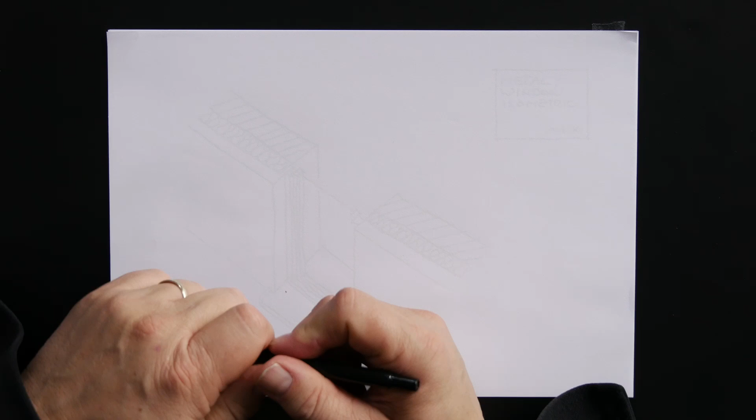Yeah, that's true. When we talk about tolerances in facade systems, we talk about millimeters. Yeah. Half millimeter, millimeter. When we talk about brick structures and concrete, it's centimeters. It's a little bit depending on the contract and the country. But for me, as a bricklayer and also making concrete walls, 2.5 centimeters is still acceptable.

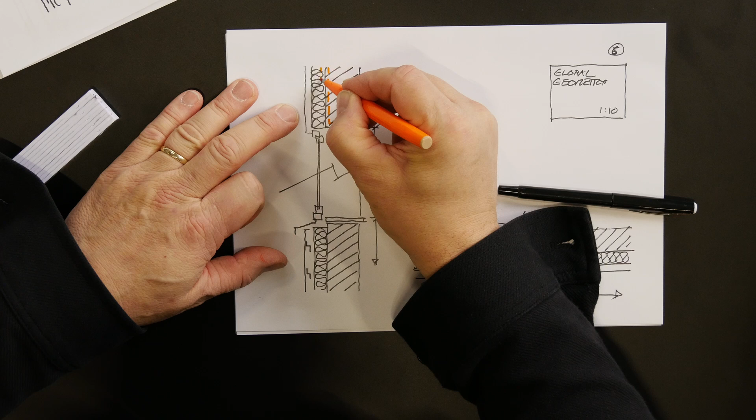So that means within 2.5 centimeters the wall somehow can find its position, while the facade system needs to be flush and the windows are pre-manufactured, so they need to fit in. When I now draw this as a line, inner opportunity and outer opportunity of where I can find the wall. Yeah, so it's in principle a zone. You have a center line, that's ideally the position of the wall. That's also what the construction guys and the general contractor aim for, but he is allowed to deviate alongside that.

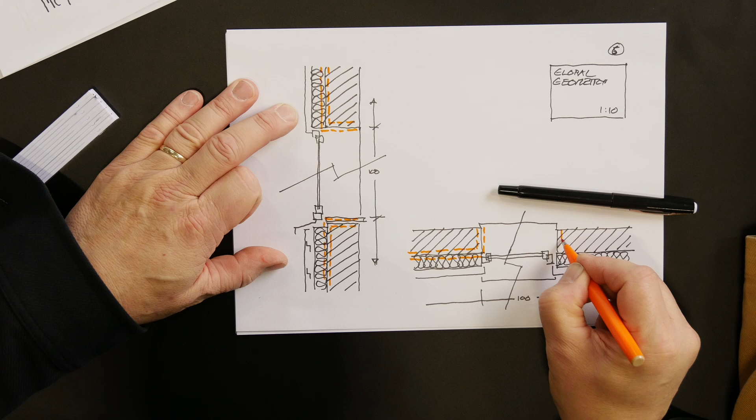And the window defines the tolerances. In this case, 15 millimeters in one direction sums up to 30 millimeters in total. So whatever the wall does, your facade construction has to be adjusted to that. I see. So we assume this is 15 millimeters in the one direction and the other direction, so 1.5 centimeters as a setting. And then it could be this direction or the other direction, so within these boundaries, which means the window itself has to be narrow enough to always fit in. The facade system has to be straight enough, or say flush here in this situation.

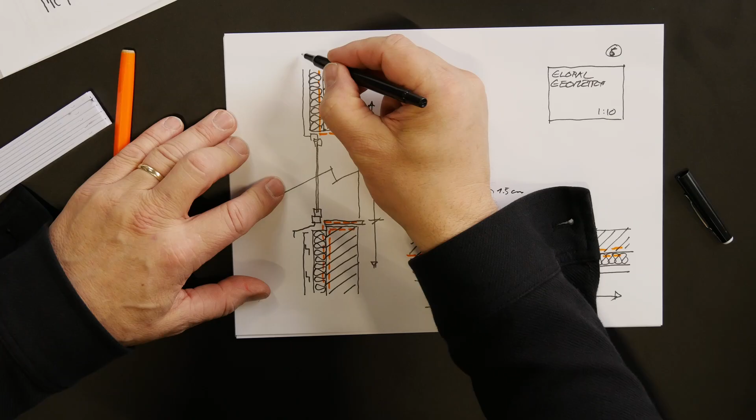Precisely. Which means we need to somehow be able to adjust it in this direction, which we saw at the mock-up. And then this creates, again, the 1.5 centimeters. This creates a flush facade, an always fitting window. But the interfaces, as we discussed in the details, have to secure that it's airtight, watertight. They have to be quite flexible.

So you can imagine that, for instance, the window opening underneath is a wider measurement and up is smaller. So you can also see that it's not always wider, but it could also be in a curvy, bendy motion, and you have to make sure that you can cover all of that. Tolerances.